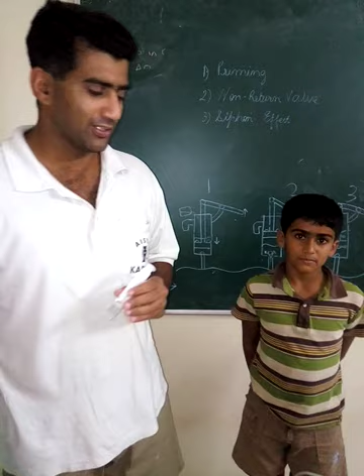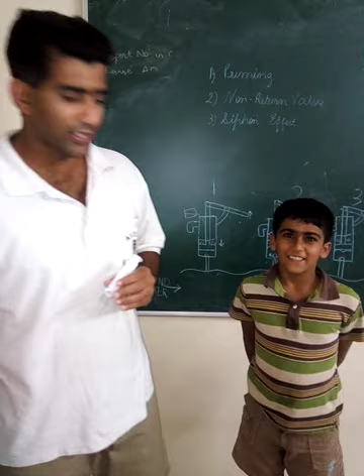Enthusiasts. After a long procrastination, I have finally been able to muster up enough enthusiasm to make a video that I had promised in my last video about the handmade water pump or DIY hand pump. With me, I have my junior science enthusiast, my son Pratham. Hello. Yeah. Together we'll explain two things. Firstly, how a hand pump is made at home, and then secondly, I will try to explain the physics behind the hand pumps. So, without any further ado, let's get started.

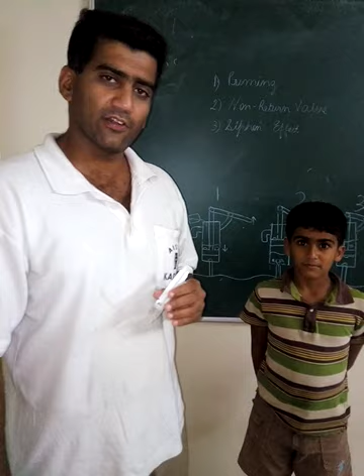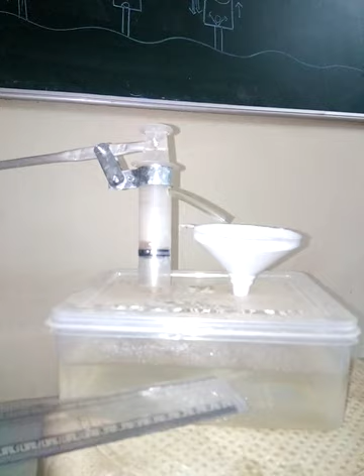So, Pratham, can you hold this for a second? Alright. So, what we have here is a homemade hand pump. What we have here is a 60 ml syringe that you can get at any pharmacy store or any hospital or dispensary. Make sure if it's a used one, you wash it properly. Then we have a funnel. We just have a reservoir which is filled with water here. This is a homemade contraption to gain leverage. This is not absolutely necessary, but this is just made to make this toy or project close to real life. This is nothing but an aluminum rod that I got from an old antenna up on my terrace.

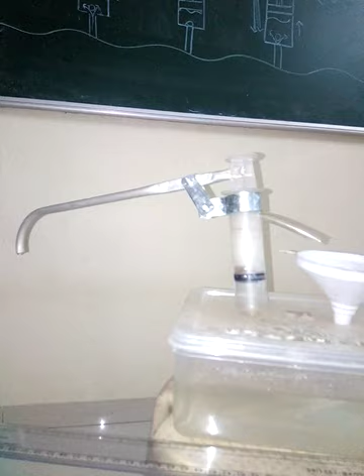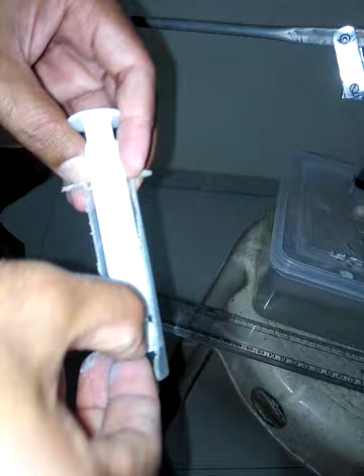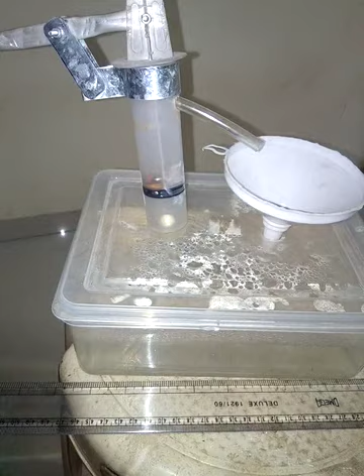This is a plunger. Now we have done two modifications to this syringe. I have a cross section right here. This is a cut section. So the modifications we have done is we have drilled a hole into this plunger. You can see here there is a little hole up here, and then this one. This hole is here to let these balls rest, and also we have removed the seat of the plunger so as to make it a flat edge here. Usually this 60 ml syringe has a convex surface or a seal. We have kind of sliced a little bit to make this flat. Okay, so this is your cross section. This is how it looks.

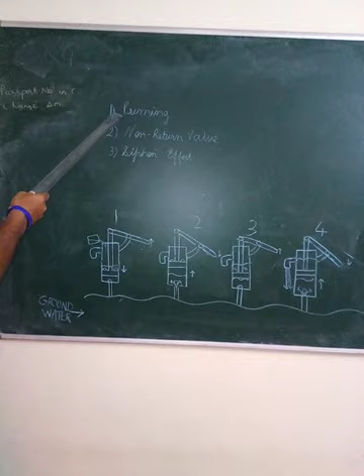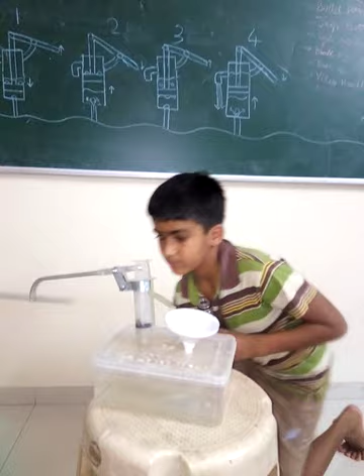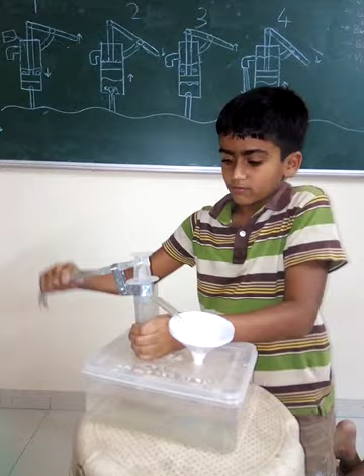Now in today's video, we'll try to explain three functions. One is priming, one is a non-return valve concept, and another is a siphon effect. But before we get there, I'll ask my junior scientist here to do some demonstration of how this thing works. So he'll start first with priming. So what he does is he's basically putting water into the syringe, which is empty right now, to prime this up. And now he's going to start showing you the operations. Here you go. As you can see, the water has now started gushing out of the spigot, just the way real life would. Thank you, Pratham. That should do it.

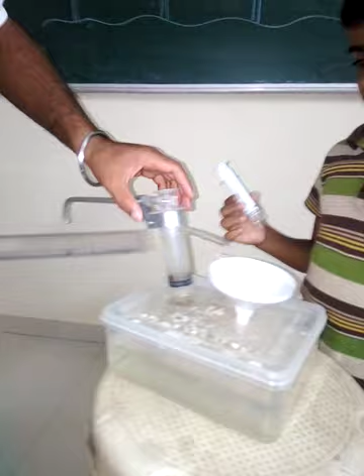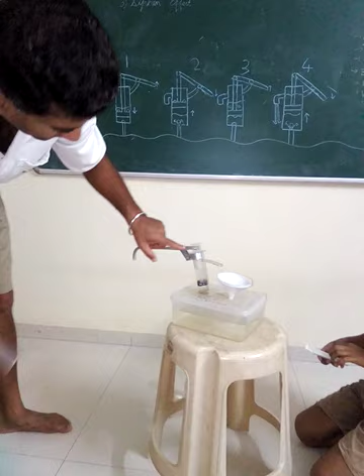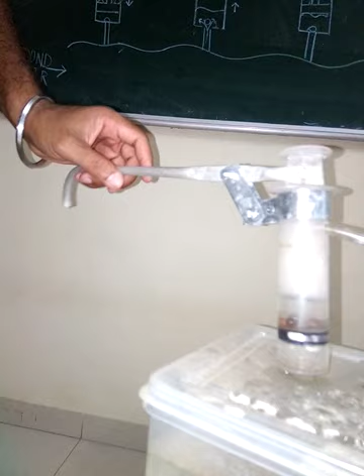Just for the sake of showing you how this is made, we have got these tin metal strips here from a local tin maker, which come very cheap. For me, it only cost around 5 rupees. And then I have drilled holes here. Can you come a little closer? I have drilled holes here so that this aluminum rod fits as per this leverage pattern here. This is your fulcrum here. This is the fulcrum, this is the pivot, and then it kind of pivots around it. Now you may argue that you don't need this. Yeah, you don't need it because you can pull this up with hand, but then it's not as attractive as it is right now. Okay, alright, so that's how it's made.

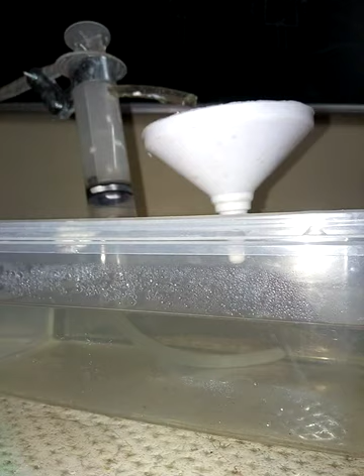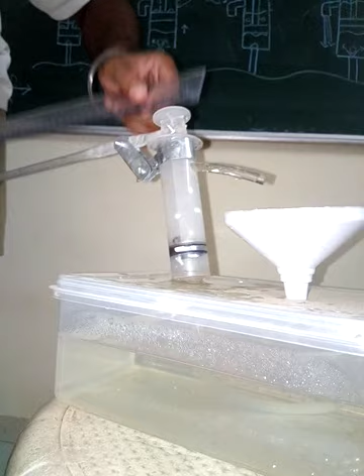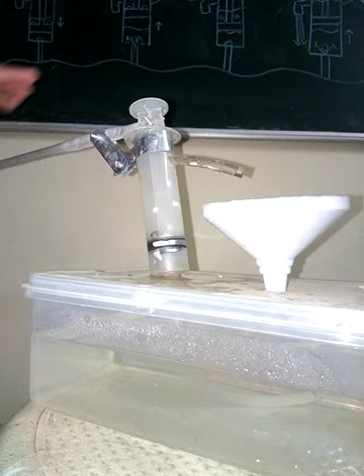Two holes drilled here, basically one for the funnel and one for the syringe to go in, and then there's a pipe that goes inside just to make sure that the groundwater is pulled up here. Now this arrangement is done so the water stays in a closed system. You don't have to keep constantly moving the water out and in. It just keeps circulating. Alright, as you can see, the length of this bar can be adjusted according to your requirement, but right now it's close to a foot. It's a foot long bar, and it gives you sufficient leverage. If you have it shorter, then you will find it difficult to move the plunger up and down. If it's too long, then it impacts the stability. So I found a foot long length is the optimum length.

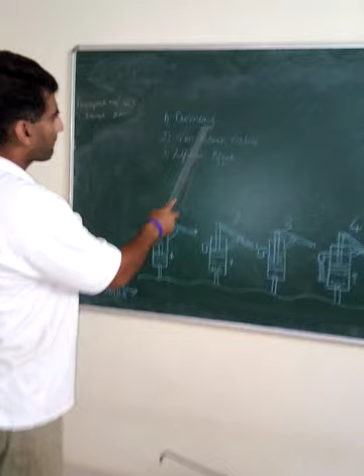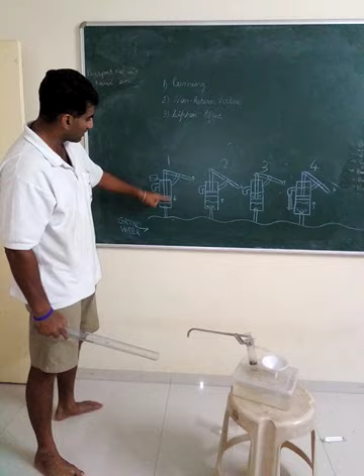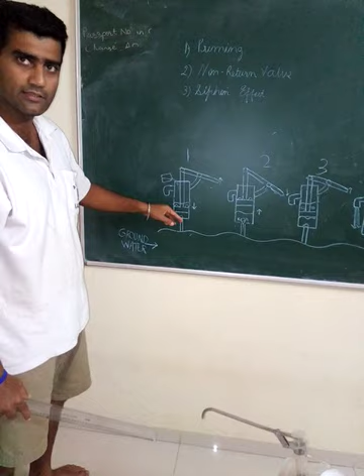Alright, as we saw the demonstration, now let's try to explain the concept. So the first thing, as you saw Pratham do, is priming. Now what is priming? Why didn't Pratham run the pump directly the way it is set up here? Priming is basically an act of putting external water into the top chamber of the pump. If we didn't do it, then there was no way for these non-return valves to stay in place and the air would escape, and thereby there would be no negative pressure that is required. Now we just spoke about another concept here called the non-return valve. Now what is a non-return valve?

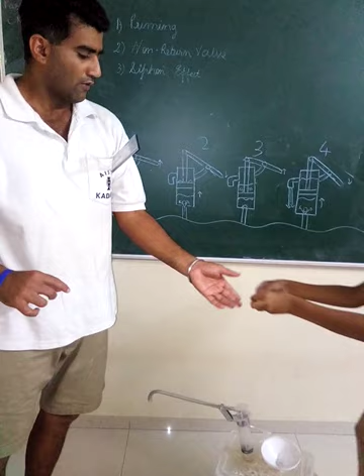For those who are engineers, you will already know it, but for the ones who are not engineers, let me try to explain it. A non-return valve is a valve that operates in only one direction. We have made a homemade version of a non-return valve here.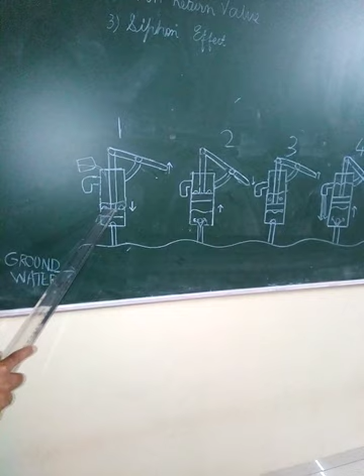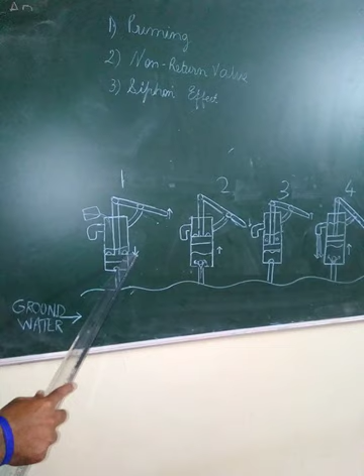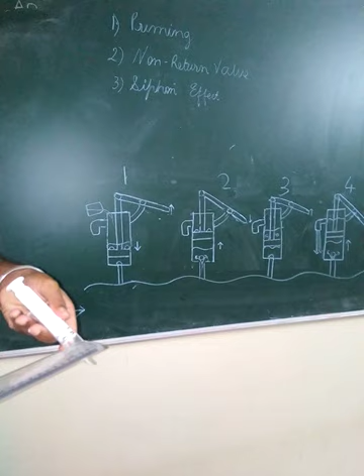Similarly, you have another one here. All right, so we have in total two sets of non-return valves, the one down here and the one down here. When you prime it, this water goes and locks itself in this upper chamber and closes these two non-return valves shut. Then when you pull this plunger up with these two valves shut, you are now creating a negative pressure here.

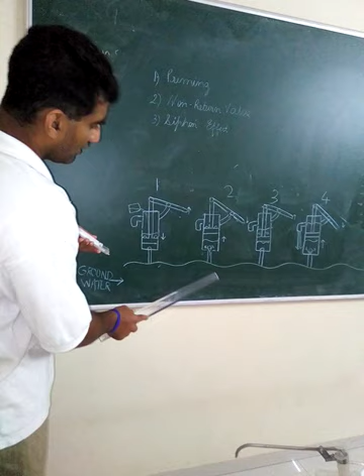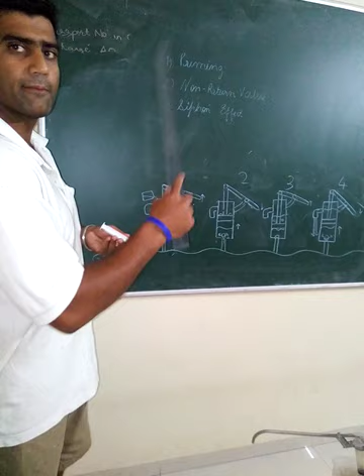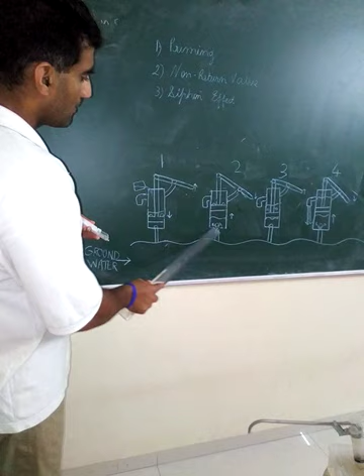Because if these non-return valves are closed, there is no way for the air to escape, and thereby you create a negative pressure here. The moment a negative pressure is created, water from the groundwater table will rush, and that's called a siphon effect. Siphon effect is when you create a negative pressure, the water or incompressible fluid will get pulled up in the direction of the low pressure area. Now, because this valve here is again a non-return valve, it allows the water to get in, thereby filling the lower chamber below the plunger with water.

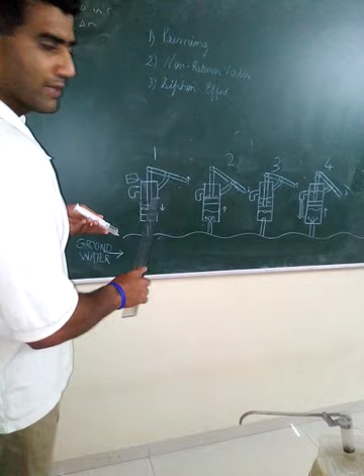So we have solved one out of the two problems. There are two problems, right? Firstly, we have to get the groundwater into this barrel, and the second problem is to get the water from this barrel out for our uses. So we have solved the first problem, getting the groundwater from below into the pump, and we achieved that by priming as well as this non-return valve.

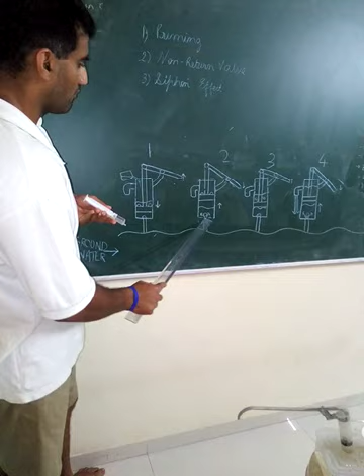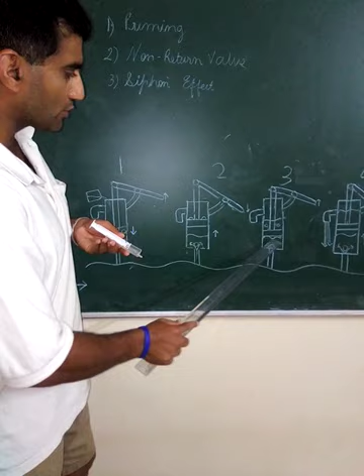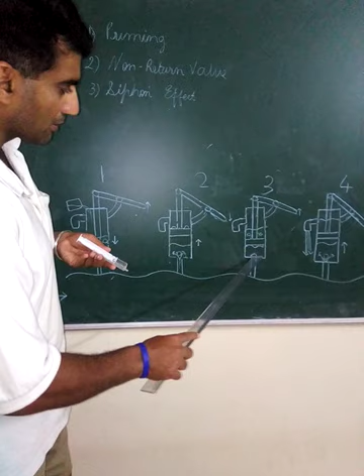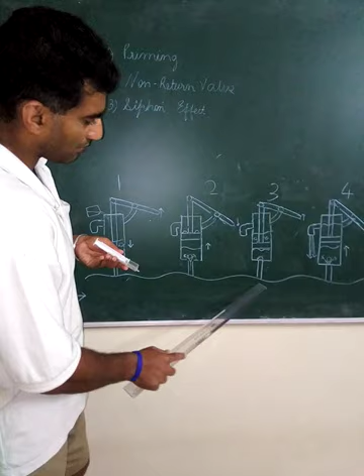Now, how do we get this water that is in the lower chamber out from the spigot? To get to the spigot, it has to first come from the lower chamber into the upper chamber, and this is where you start applying the downstroke on the plunger. When you apply the downstroke, the water will shut this non-return valve, so it will not escape below again from the path that it came. It's a very smart entrapment mechanism.

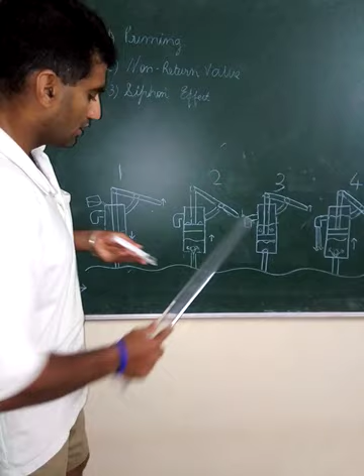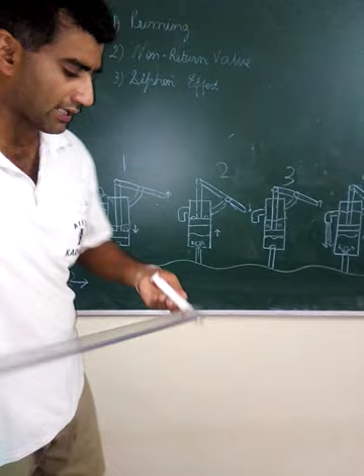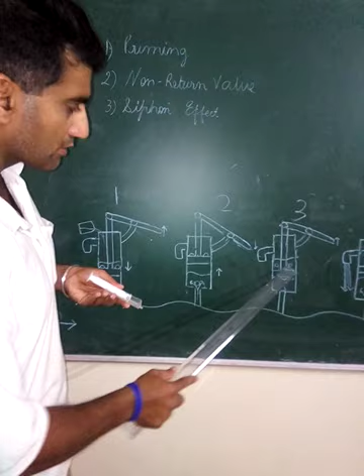And because it's incompressible, it has to go somewhere, you can't compress water, so it's going to put a force on the upper non-return valve, thereby raising those two ball bearings or floating them, and water will start gushing through the holes that are cut into this plunger. So we achieved part of the second problem, getting the water from the lower chamber through these non-return valves into the upper chamber. But the final part is not solved, the water hasn't come out of the spigot.

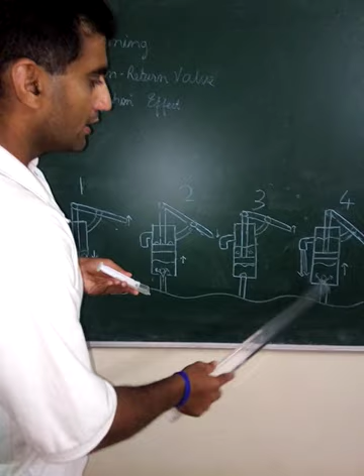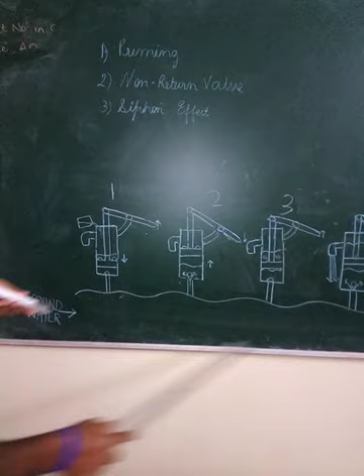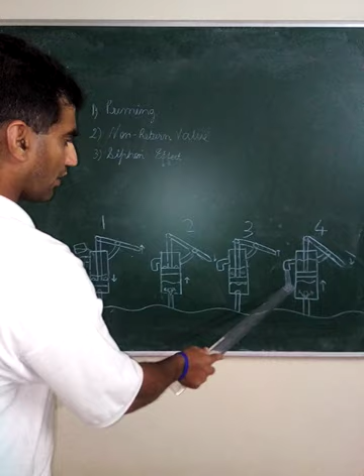Now that's very simple. The moment you get it into the upper chamber, you pull the plunger up again, as Pratham showed you, and the water starts flowing out of the spigot the moment it reaches the level of the spigot opening. Then the process continues, because when you pull the plunger up, this non-return valve opens up again, letting fresh water in here, while sending out the water from the upper chamber. And so this continues.

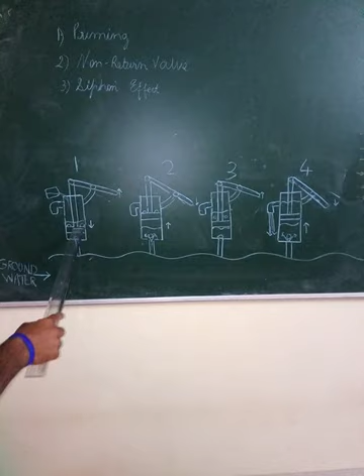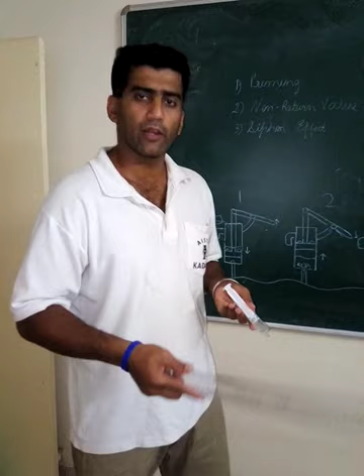Now, do we have to prime it every time? No, because the moment we prime it the first time, the negative pressure is already created. Unless there is a leakage in the pipes, the lower chamber or the groundwater pipe, you don't have to prime it again. That's why when you see hand pumps in real life, you don't see them getting primed over and over again. It's a one-time activity.

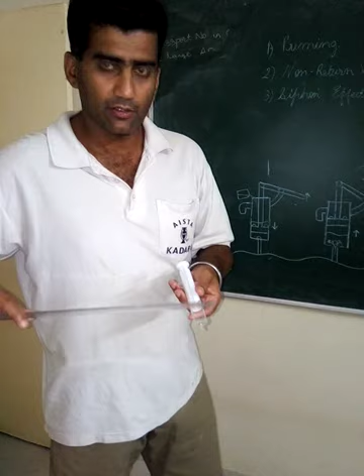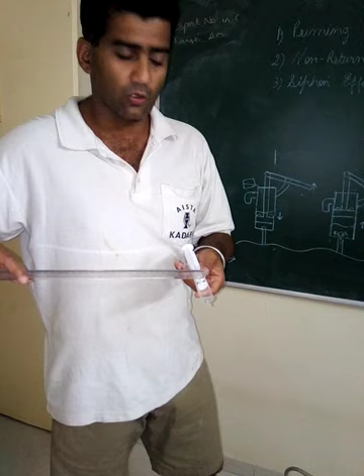The success of this mechanism depends on two things primarily. Needless to say, you have to have water down below. You can't pump it dry. One is the sealing between this plunger and the chamber. The sealing has to be really tight and good. The second is the selection of these balls that close the non-return valve. The bigger the hole and the bigger the non-return valve, the quicker and the higher amount of water that's going to flow out. But then you see water spilling.